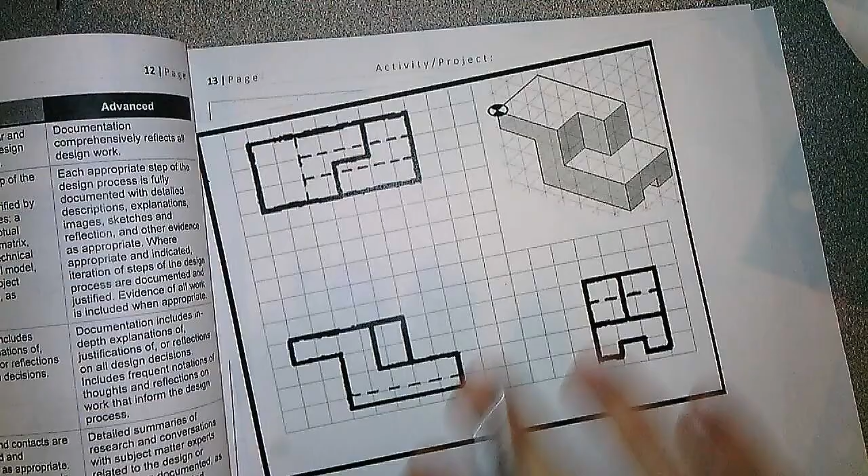Alright, ladies and gentlemen, this will be the instructions for step 7, which we will be doing this slightly more complicated shape. I'm going to start out by drawing out each of the boxes.

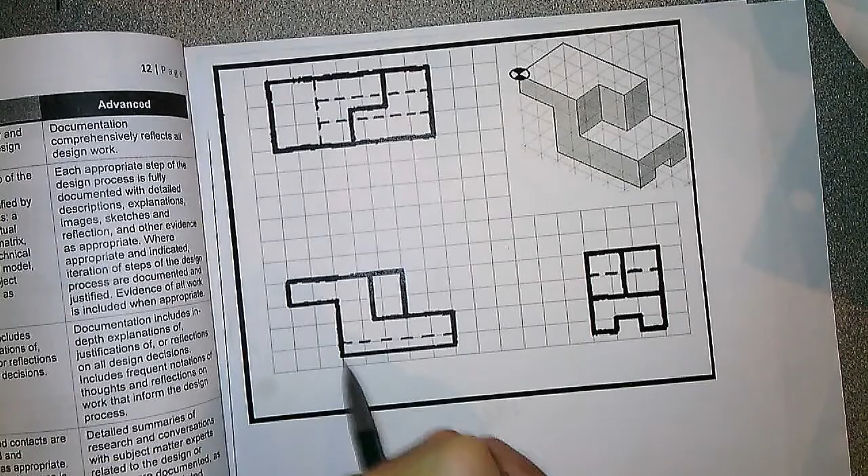Again, making sure that my front and my top line up right here, and then my front and my side line up right here. Make sure, again, that you use the same number of boxes that are used in each of these. You'll notice this one requires you to use that half box on a few of them. So let's go ahead and get started. I'm going to start out by just drawing out those 3 drawings.

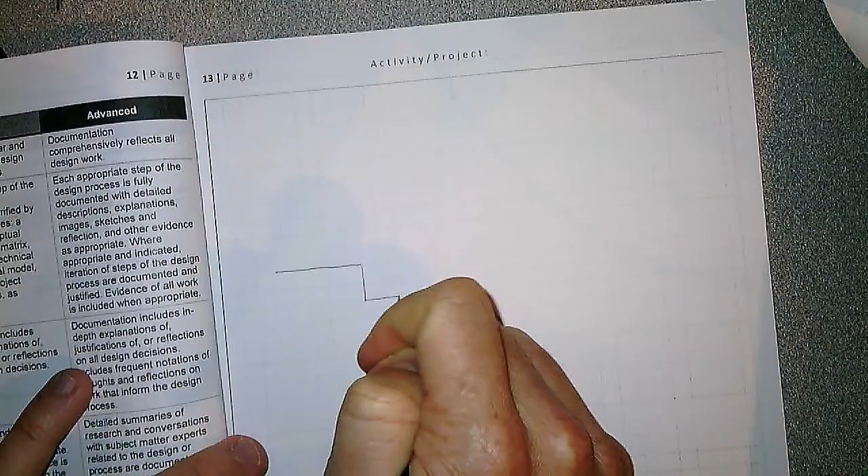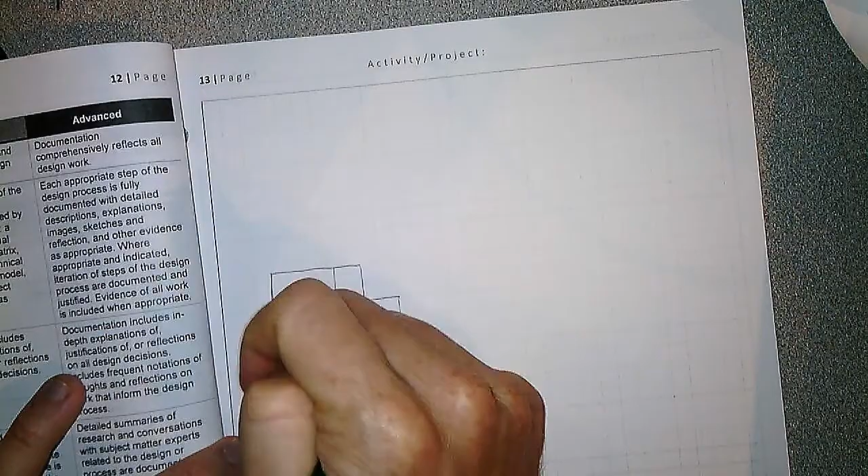Boxes. 2, 2. I also have 1.5 back here. I'll just only need 1 box down, not 2. Also need to clip this hidden line.

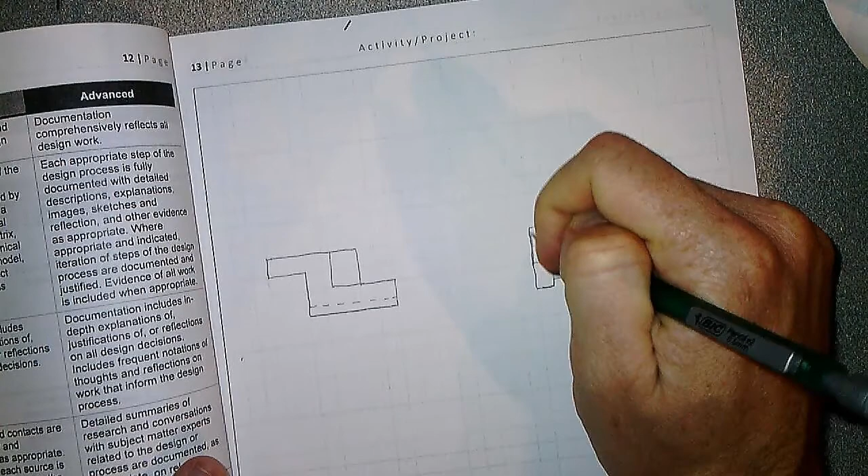And making sure that this line is on the top and the bottom. That's good. Okay, then I'm calling it the top view.

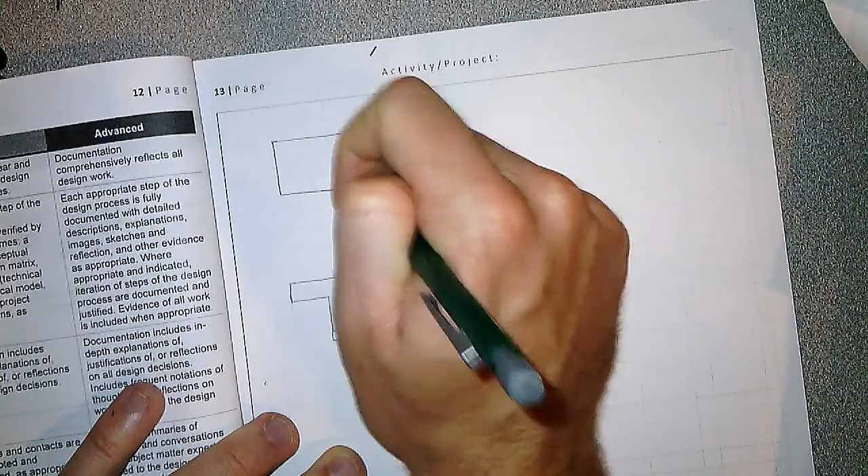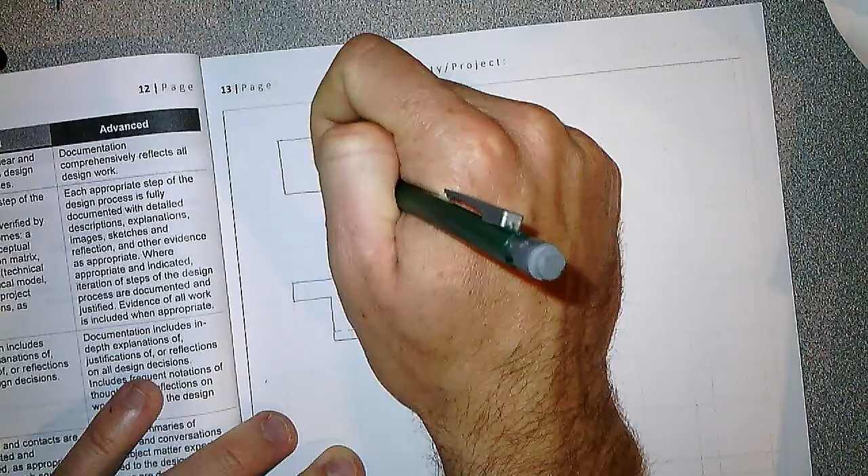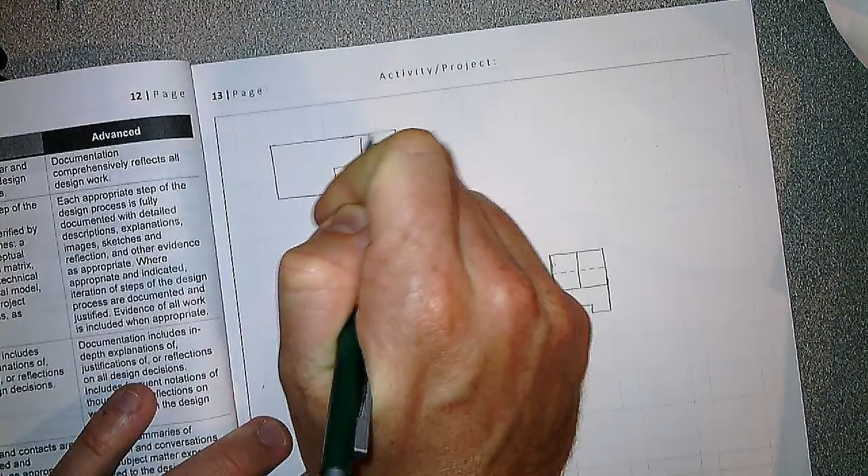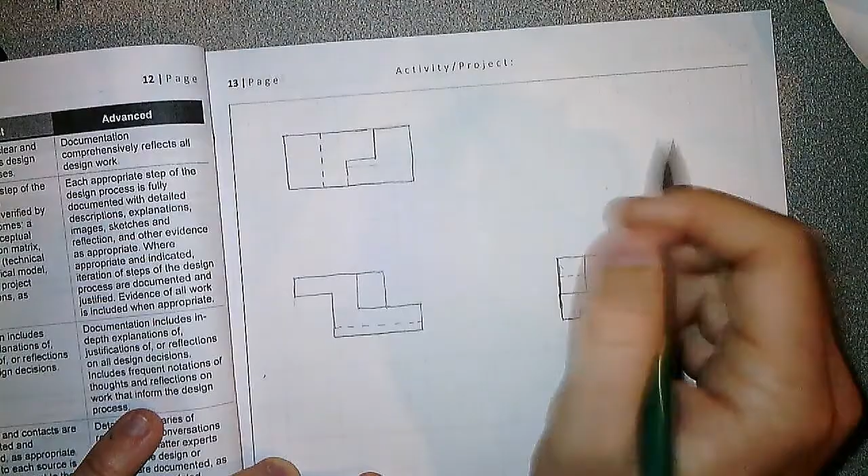Make sure this goes to the center of this piece, not the first line. Adjustment. And don't forget to do your hidden lines. Now my hidden lines right here, and right here.

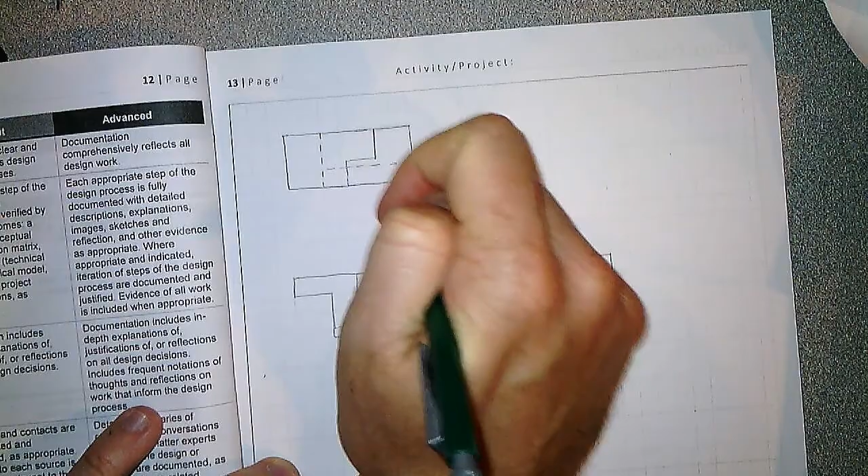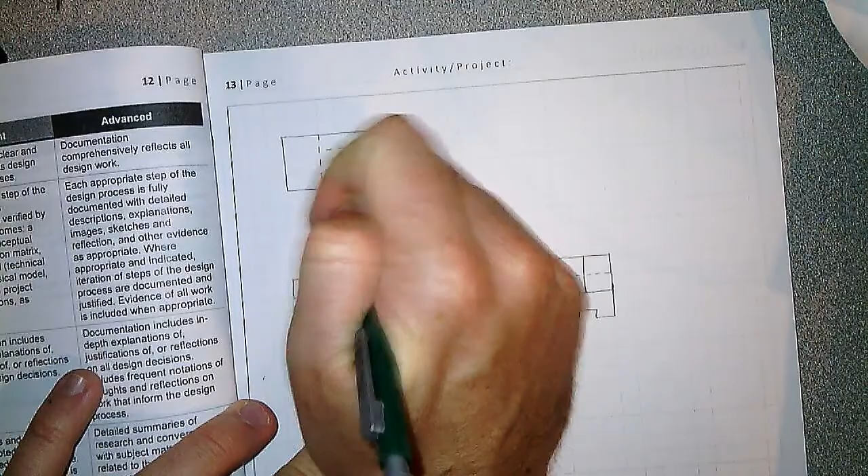Okay, so now I have my drawing totally done. And again, you do not have to do the isometric view. You can if you want, but I'm not going to. So next I need to dimension this.

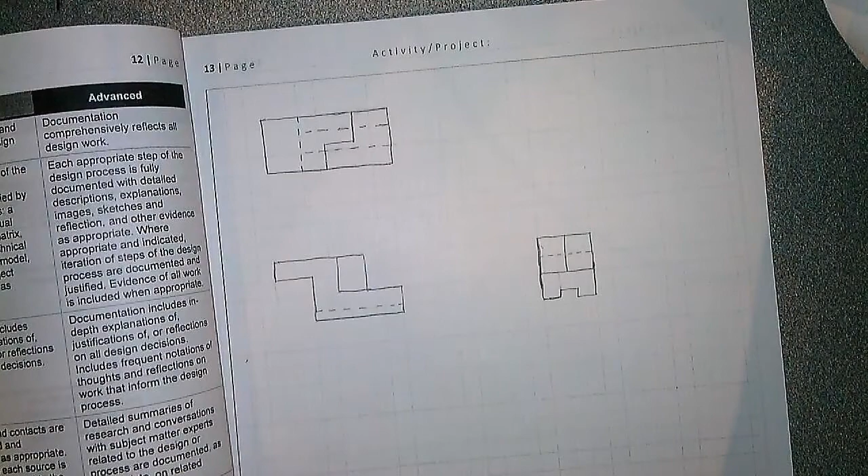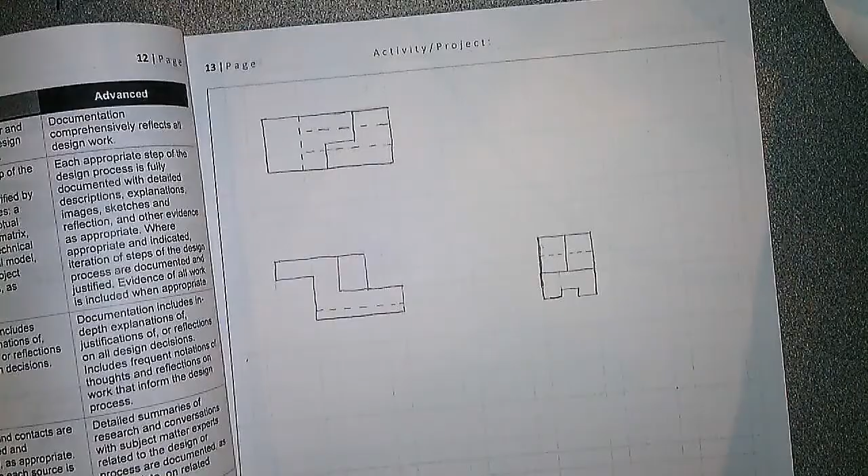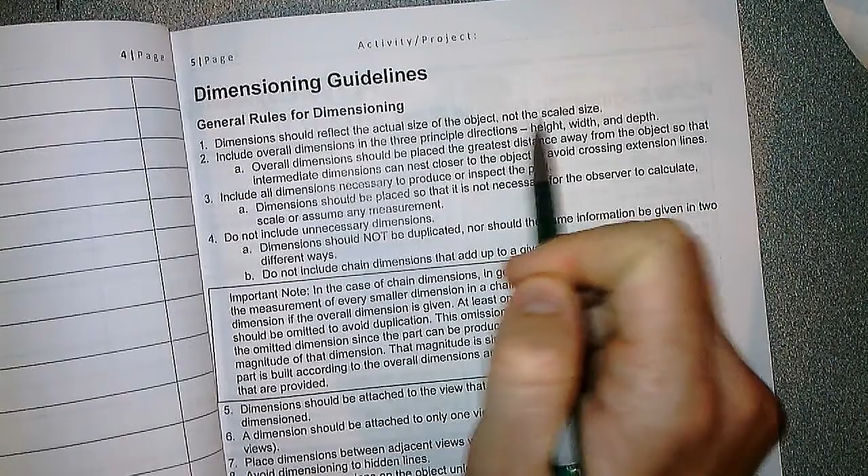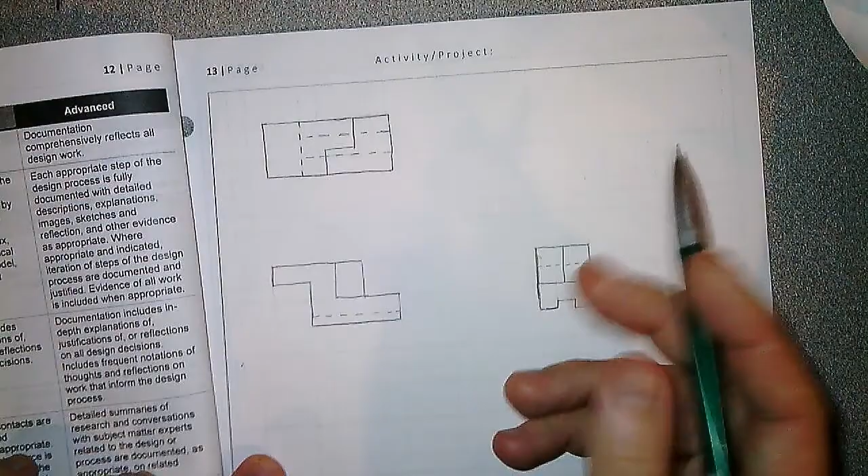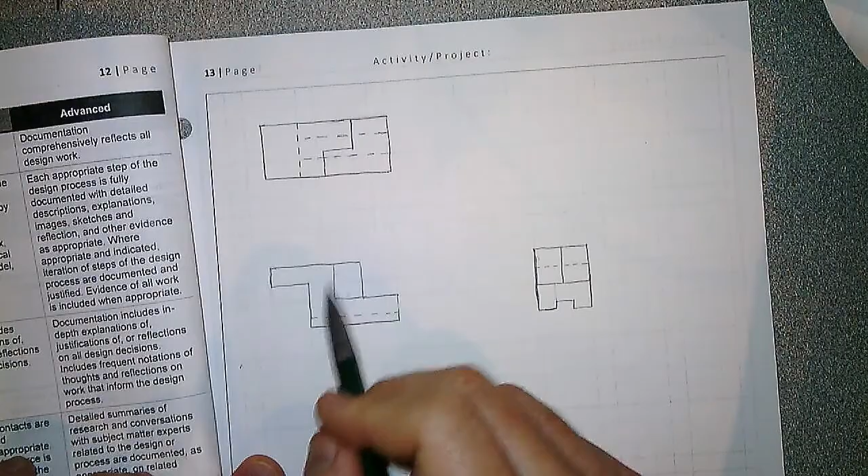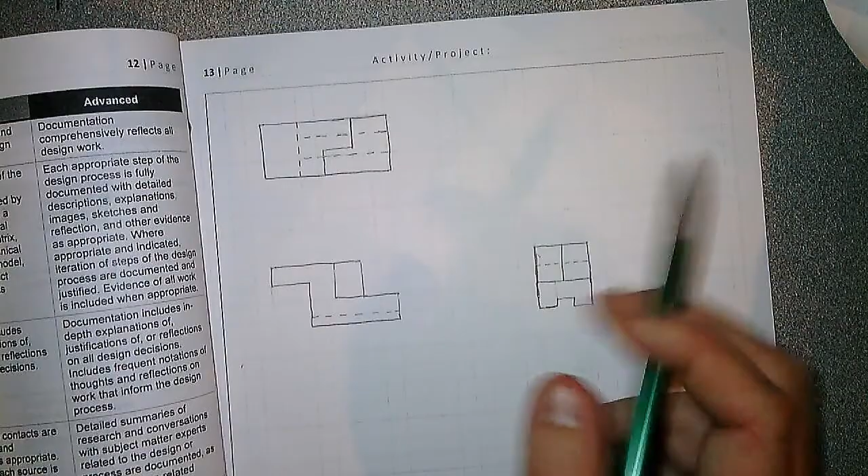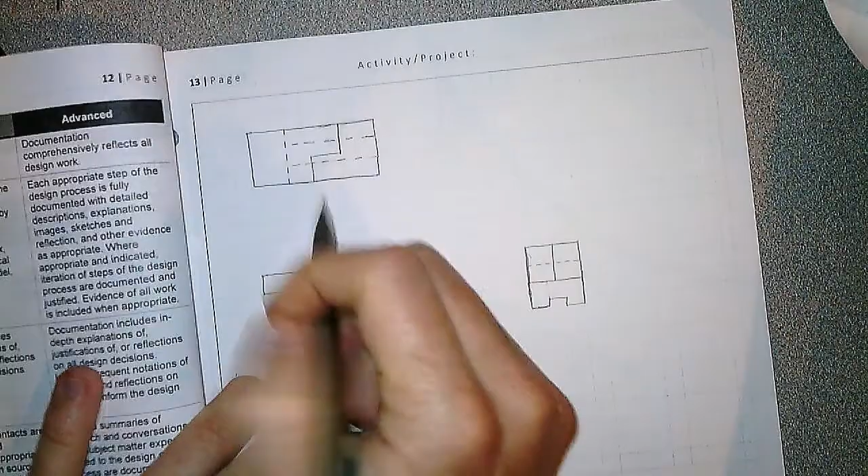I got to decide what's your overall dimensions, which view you're going to do most of your dimensions on. I think I'm going to do most of my lengthwise dimensions on my front view, most of my height dimensions on my side view, and I'm going to do my width dimensions on my top. So I'm going to put my overall height, my overall length here.

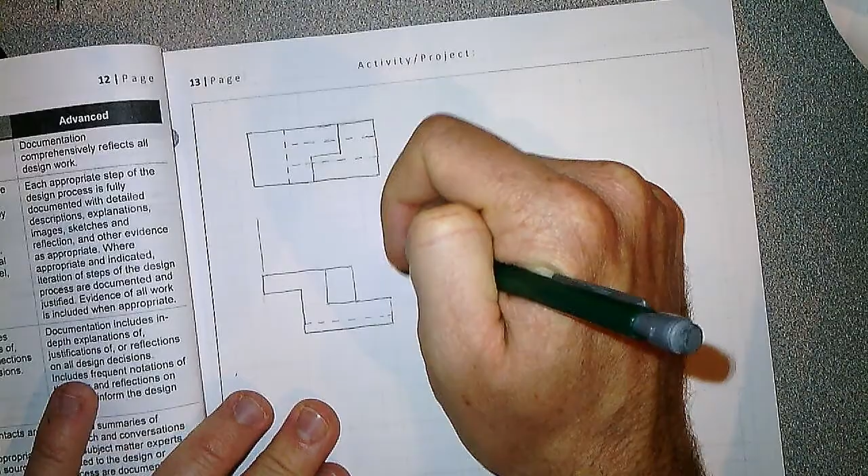Dimension line for my overall length. It is 1, 2, 3, 4, 5, 6, 7, and it's 1 centimeter per square, so that is 7 centimeters.

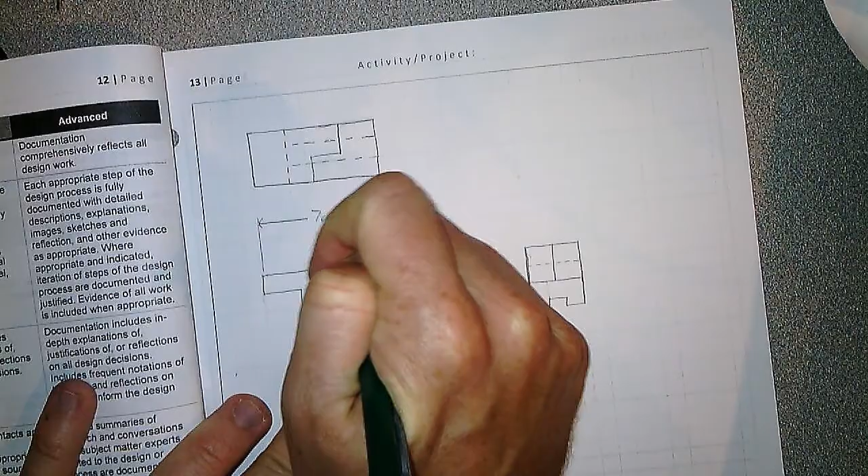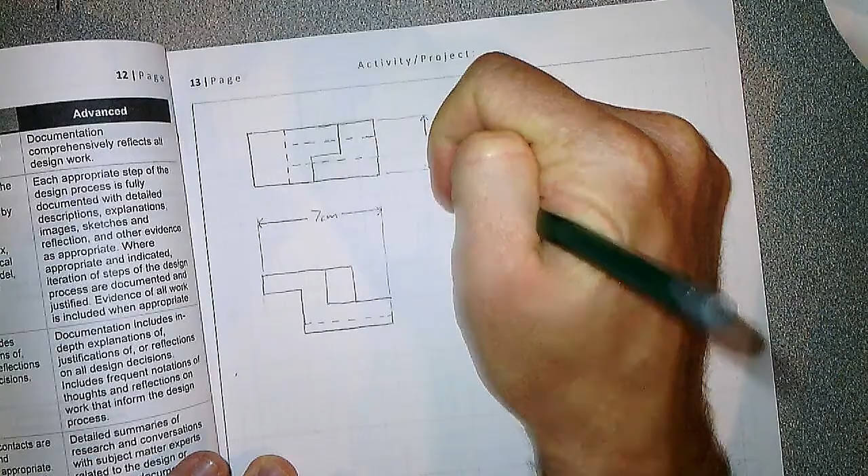And then I'm going to do my overall width dimensions on this drawing, right here. This one is 3 squares wide, so that's 3 centimeters. And I'm going to do all my height dimensions on this drawing over here. This is 1, 2, 3 and a half.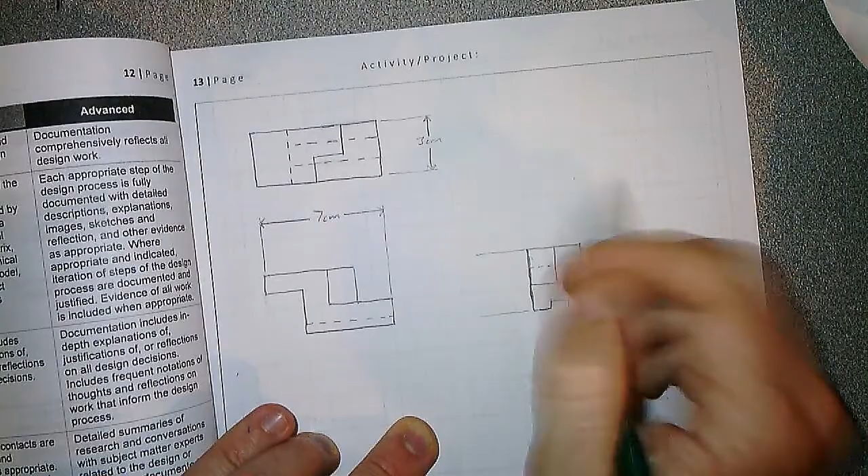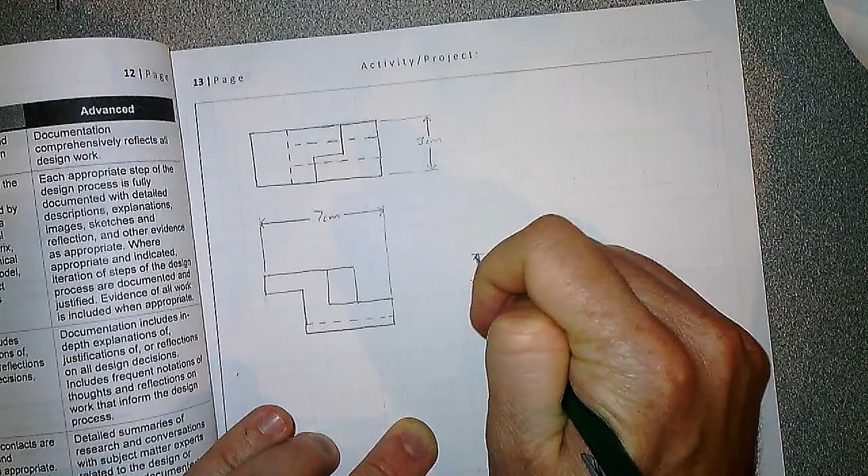Alright, so now I've done my overall dimensions.

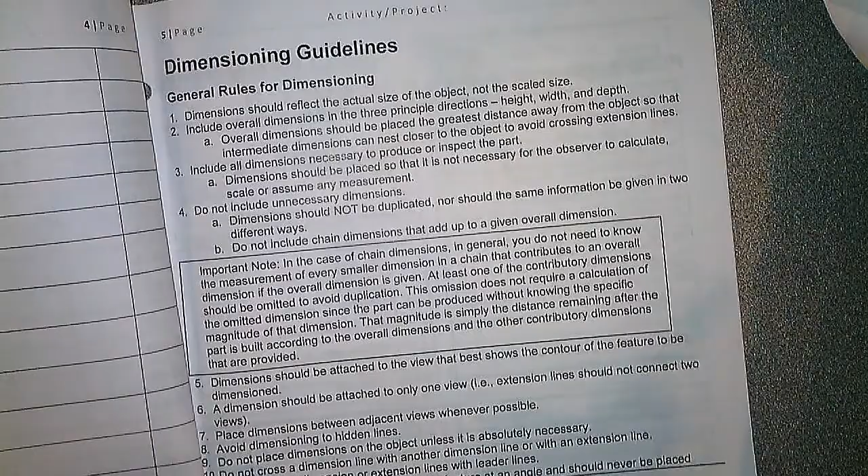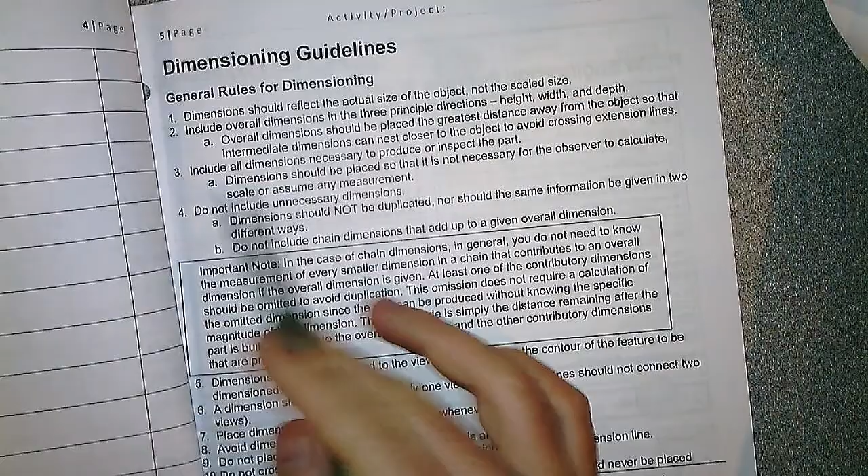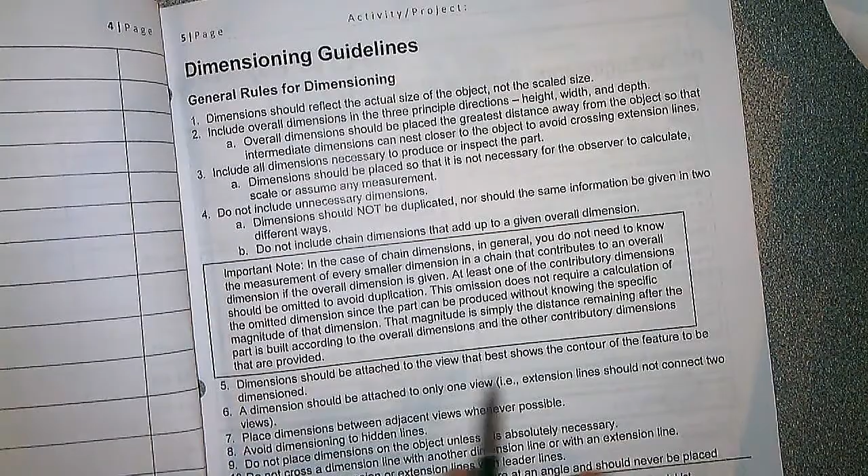Alright, I need to pay attention to all my rules on all of them, of course. But the main ones I need to focus on for this one are Rule 3, where I include all dimensions necessary to produce or inspect the part, and Rule 5, dimensions should be attached to a view that best shows the contour of the feature to be dimensioned. And Rule 8, avoid dimensioning to hidden lines. So these are the rules I've got to particularly focus on, because there's so many hidden lines in this drawing. I need to make sure I avoid those.

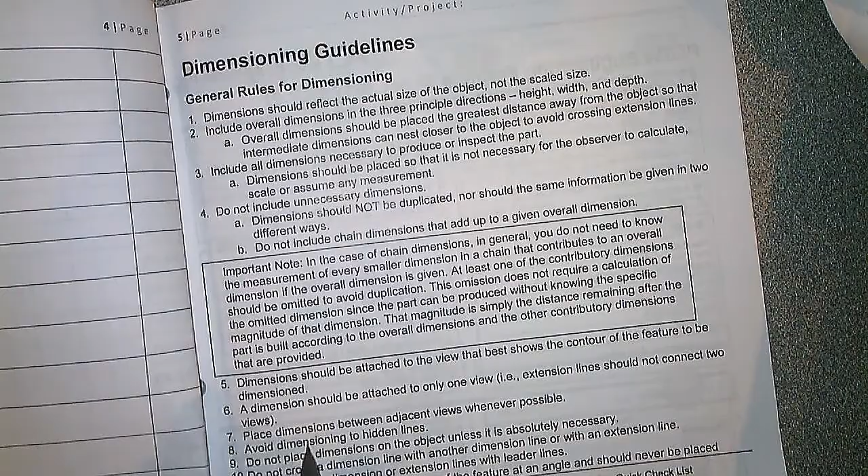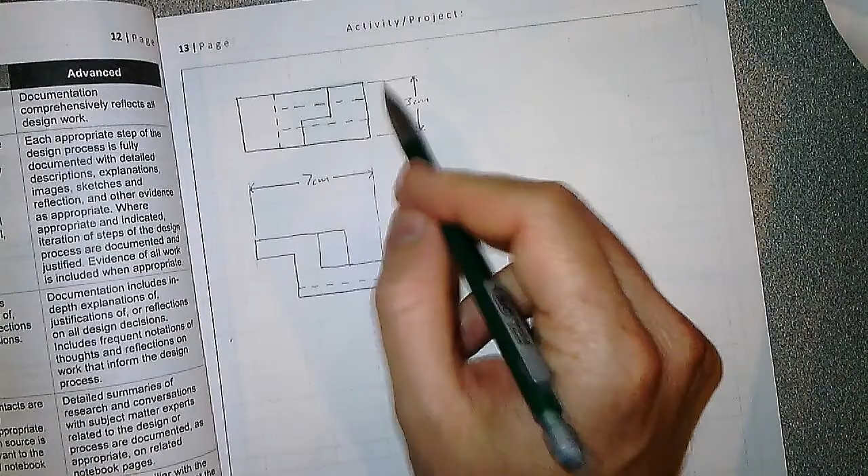But as long as I do all of my length drawings in this one, all of my height drawings in this one, and all of my width drawings in this one, I'm going to be okay. So let's start out with the lengths.

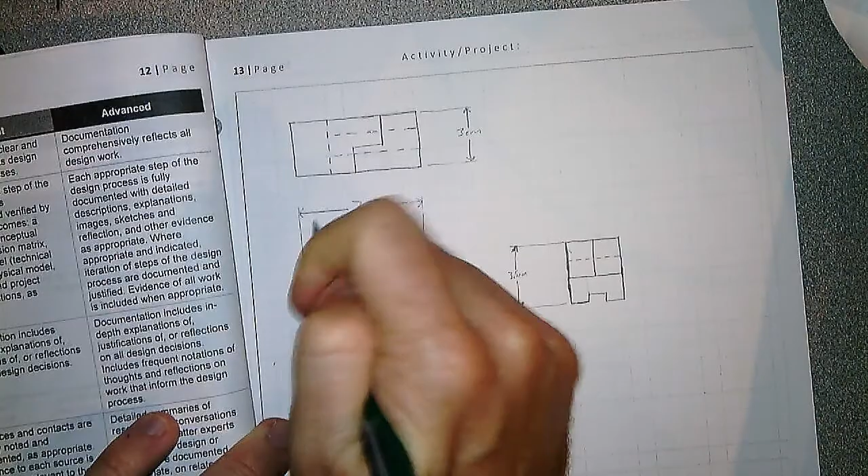I'm just going to be doing it like a nested chain of dimensions. So I'm going to start off, I need to know how far away this one is. Let's say here is 1, 2, 3, 5 centimeters. And then I need to know about right here, which is 1, 2, 3 and a half, so 3.5 centimeters.

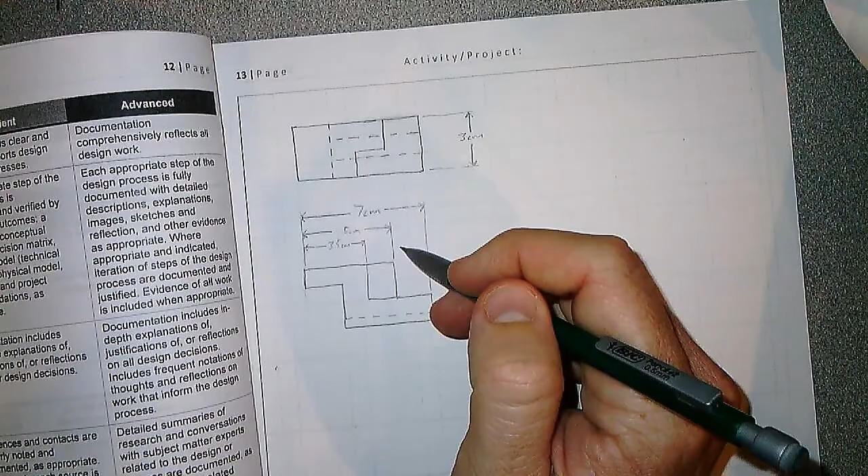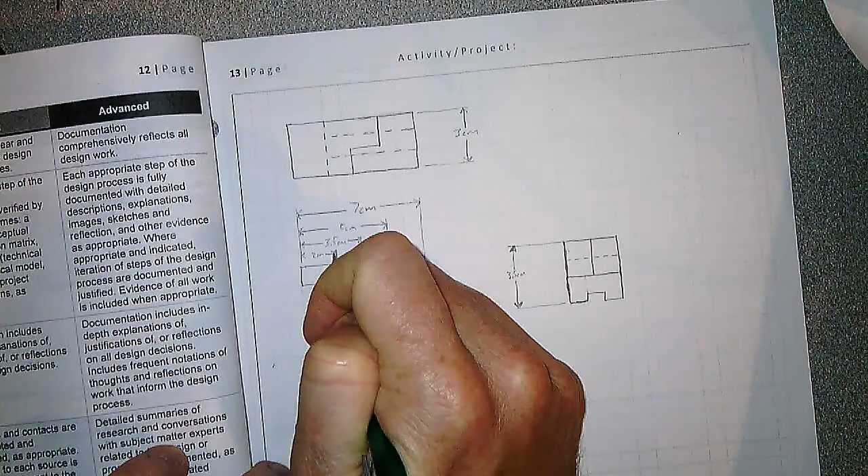And then finally, this last one is right here, showing off this feature, is 2 centimeters. And if I do these chains of dimensions right here, then I can be sure that I've not done too many dimensions. I do the same thing with my heights.

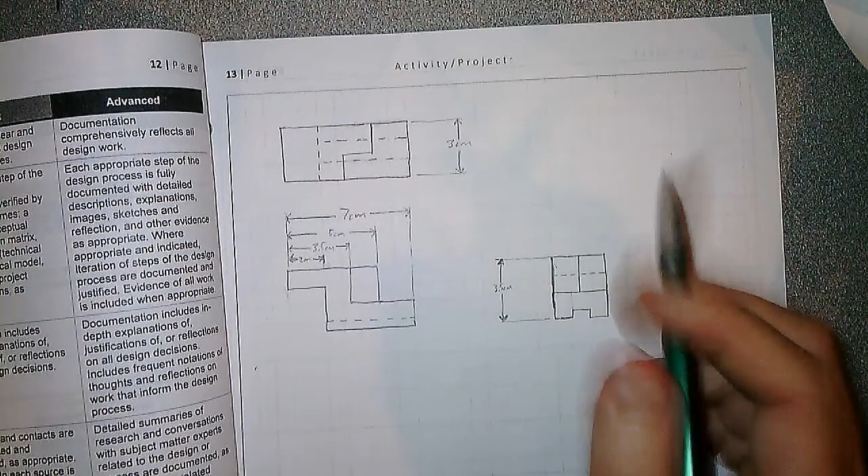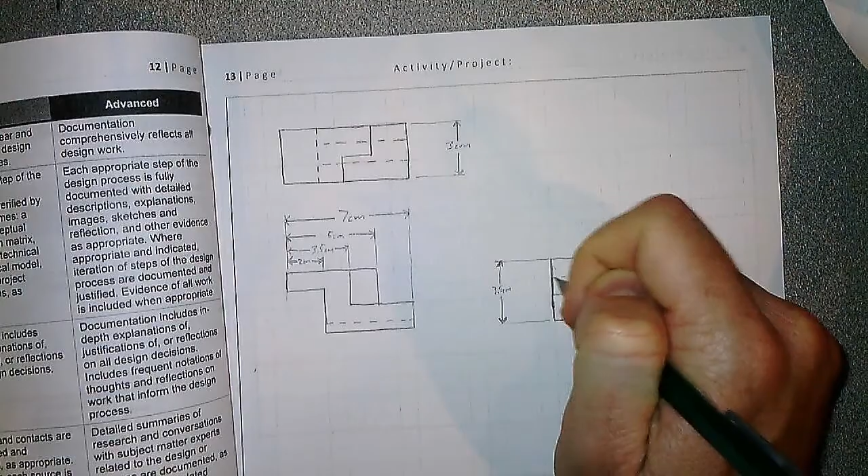So I already have the overall height. I do need a dimension showing this height from here to here, but I can't put it on this view because that's a hidden line. So I need to bring it over here.

And that is 2.5 centimeters. 1, 2, 5. And the rest of them I can put over here. I have this right here, which is 1.5 centimeters.

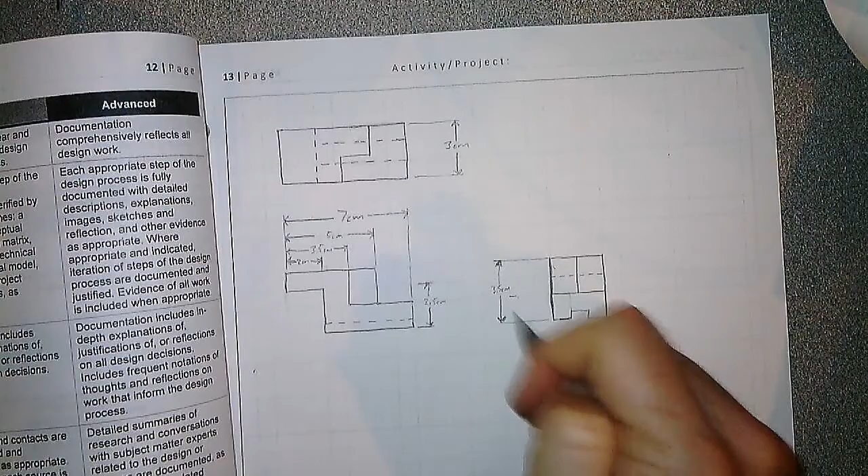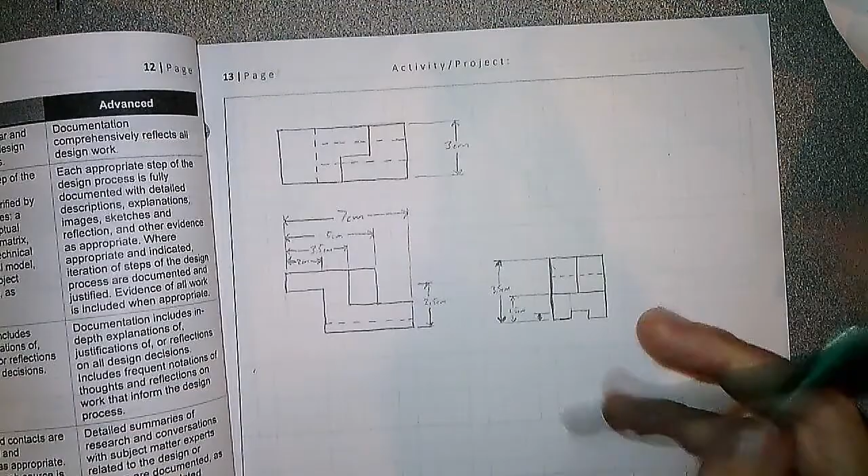And finally, this dimension right here. And this is one of those times where it is too small, and so you just drag it out here and would write 0.5 centimeters.

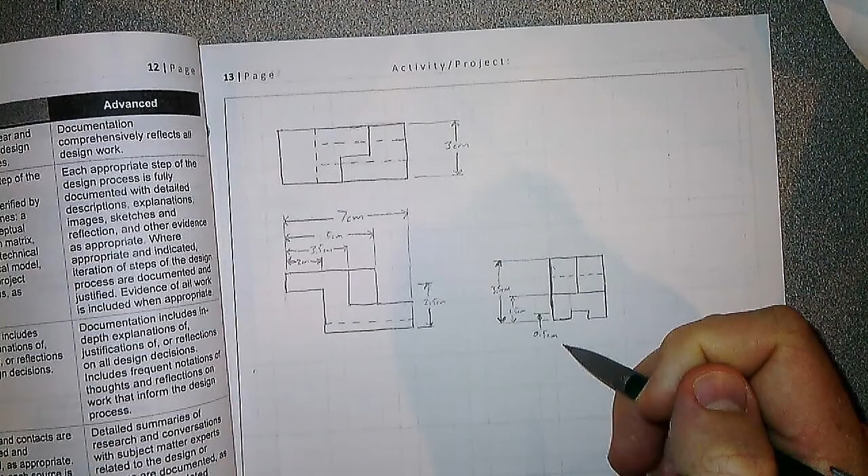And last but not least, I need to do my width dimensions. Again, there's one part that I can't do on, so I'm going to show this dimension on here.

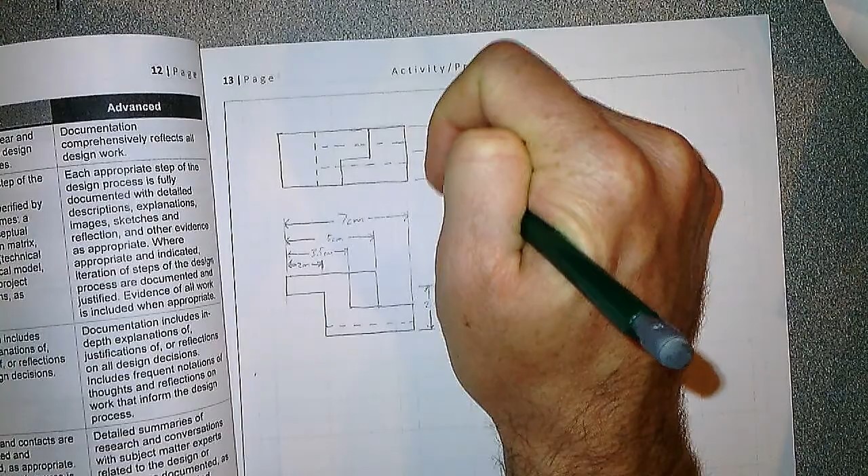So that is here, middle, and that is 1.5 centimeters. But I can't really show the width of this piece here because it's a hidden line. So I've got to bring that back over to this view.

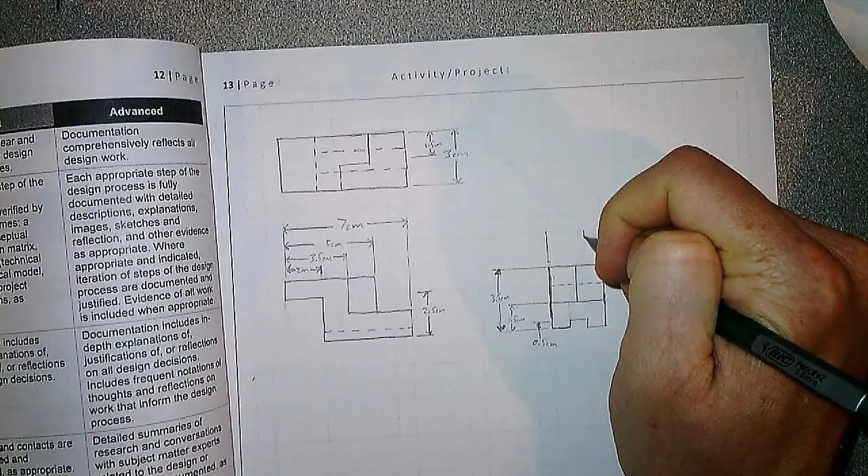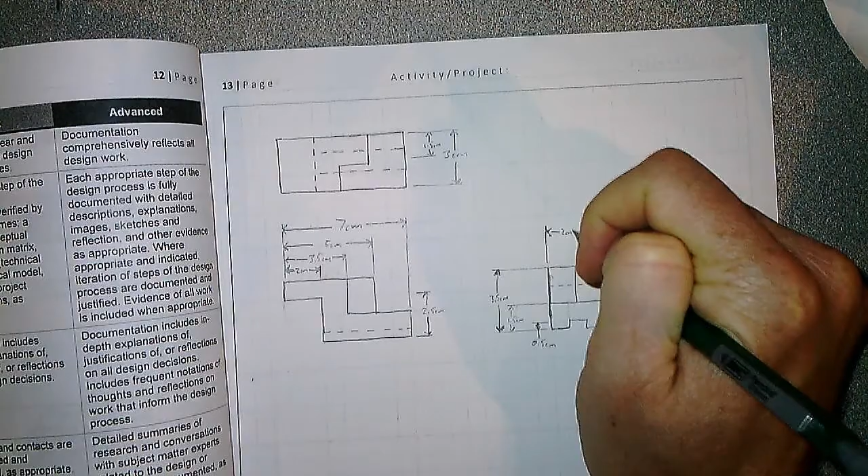I've already done my middle one, so I don't worry about that. It's 2 centimeters. And here, I'm going to one more time bring it outside because I'm going to have room. Say 1 centimeter.

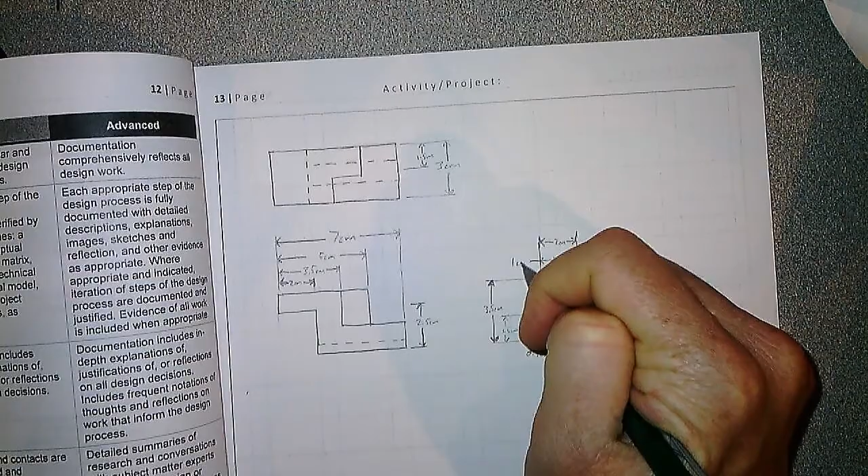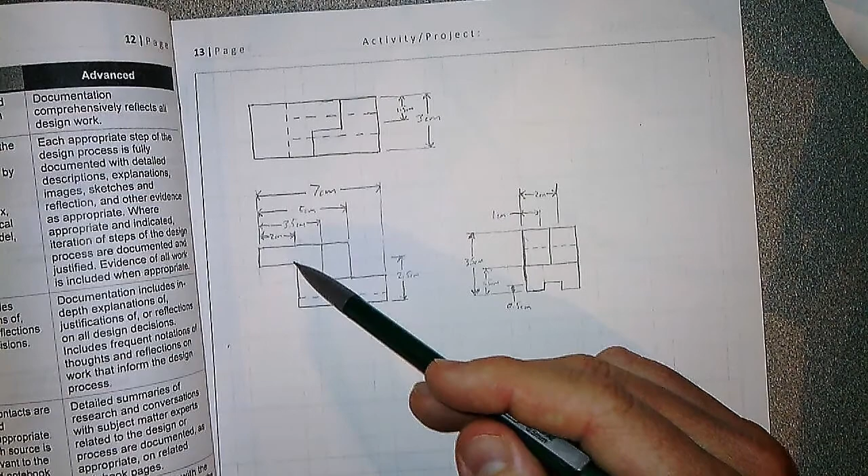So because this was a much more complicated figure, it required a lot more dimensions, but I should have them all now. I've shown the width and length of all of my features in this drawing, plus the height of this piece right here. I've shown my other heights on this drawing, plus the width of this bottom piece. And then finally I've shown the width here of that top piece. If I wanted to, I could have put all of the width dimensions on here, but I thought that would get too crowded, which is why I left it alone.

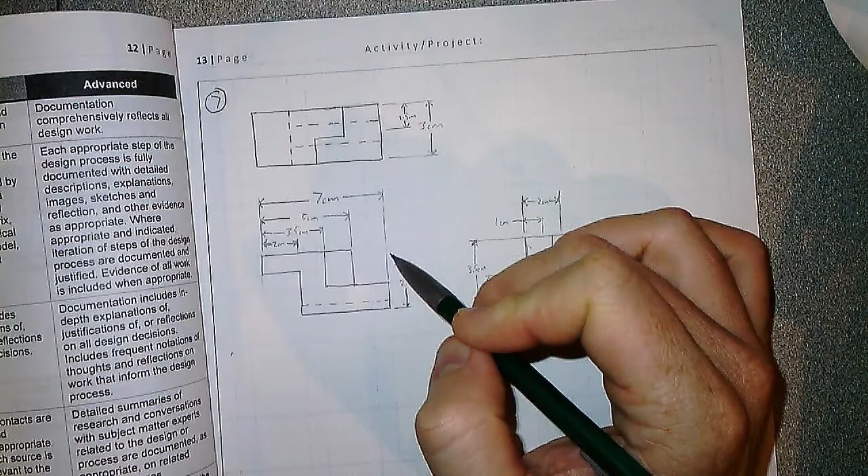And so that is how you would do it. Oh, what I forgot to do though is to label this. And now I should be good to go.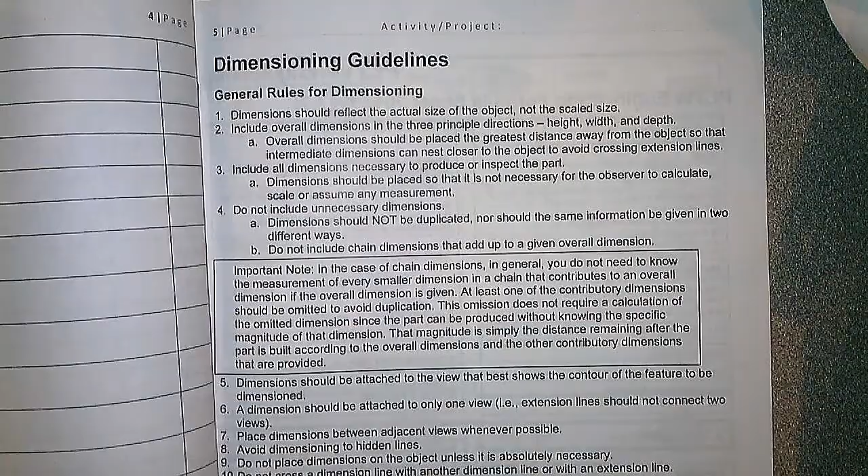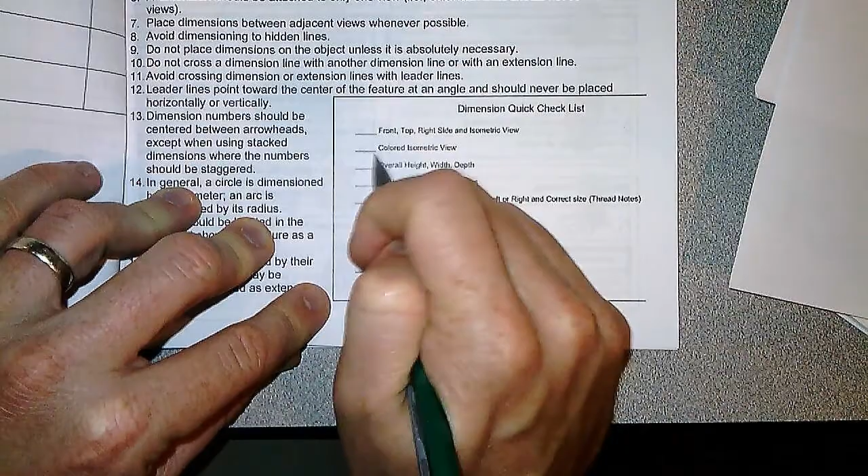I'm going to do one quick check back through my checklist. Again, I said isometric view is optional, so I don't have to worry about that part of the checklist. So check off this: isometric view, we're not doing that, so it's not applicable.

Overall width, height, depth, got it. I don't really have any center points, so I don't worry about that. I don't have any holes, so I don't worry about that. I don't have any radius or diameters because I don't have any curves, so I don't worry about that.

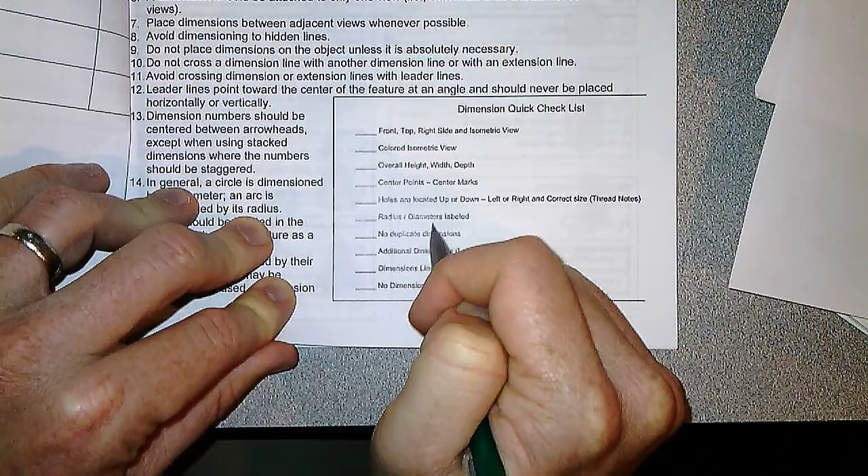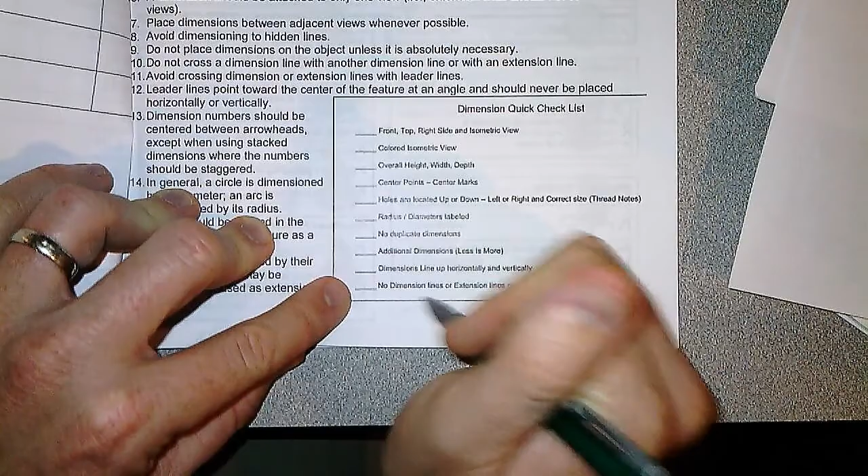I've got no duplicate dimensions. I don't have any extra dimensions. My dimensions line up horizontally and vertically. And I've got no dimension lines or extension lines crossing. So I'm good to go.